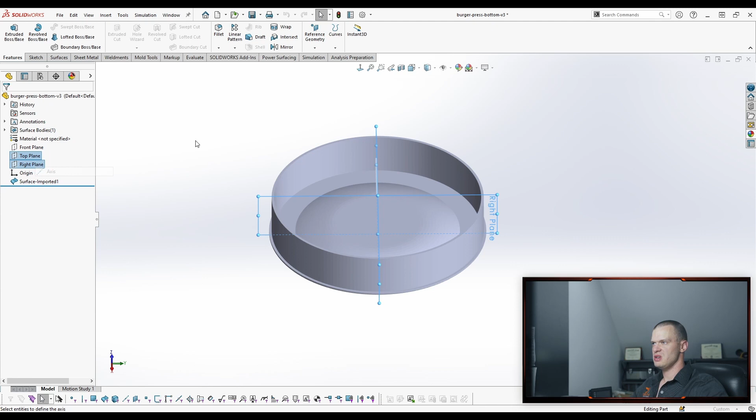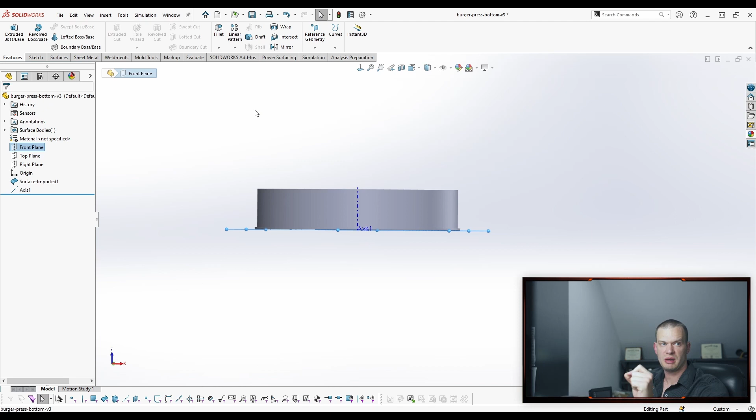One good rule of thumb is trust but verify. We know it looks pretty good, looks good enough, and that somebody's probably adjusted this so that when the STL loads, it's right. But one hard thing with scan data is sometimes the origin isn't properly defined when they export the file, so you'll bring in a scan and your origin is miles away. You're not even close, or maybe it is close, and that's why I'm doing this as an example. Maybe it's off by like 50 thousandths in a big model, and you'll never see it until you go to put that part you designed into something and you're off, because you just assumed it was in the right spot.

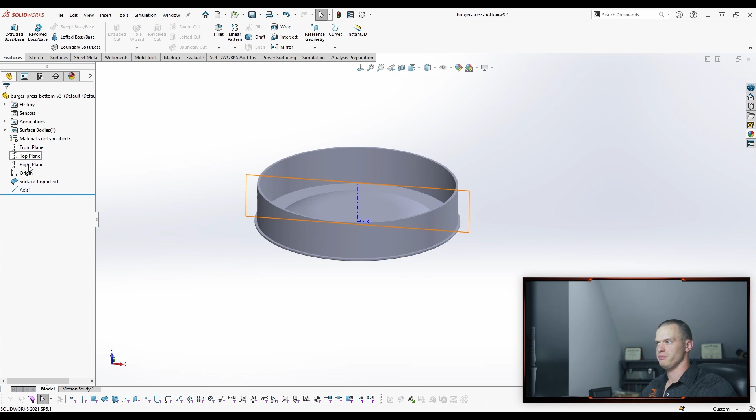So what we're going to do is we made an axis, which is super stable because it's based on these planes. Now before we start using these planes, we're going to verify that the center of this imported body is in line with that axis. So we're going to find the front plane and do the same thing we've been doing for a while.

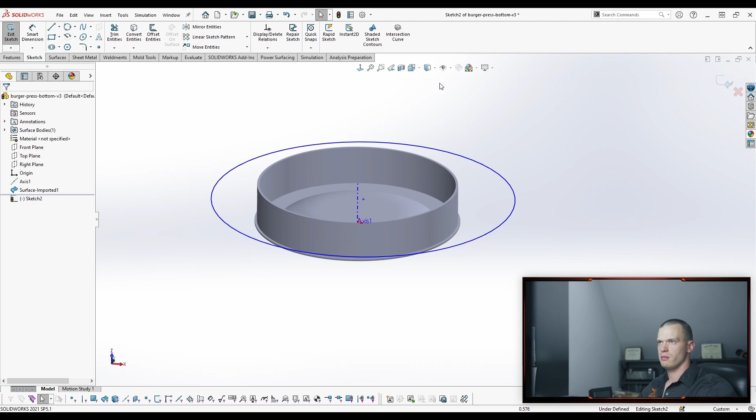So you didn't even try to draw it on the surface, you just put a big old circle up there and then start picking points. Yep, exactly. That's the same thing we were doing on that first one, or like when I was doing the cutouts.

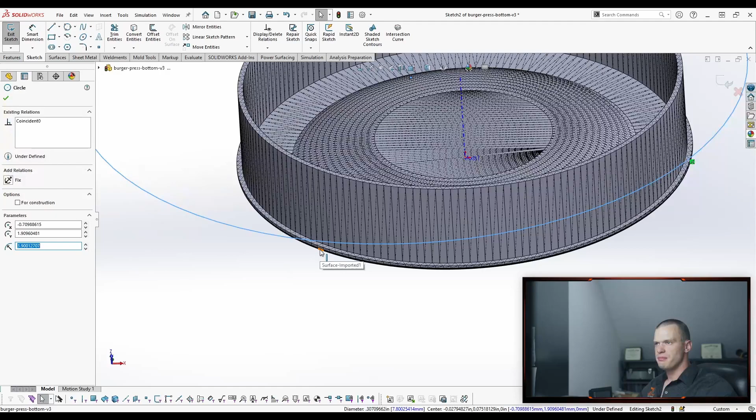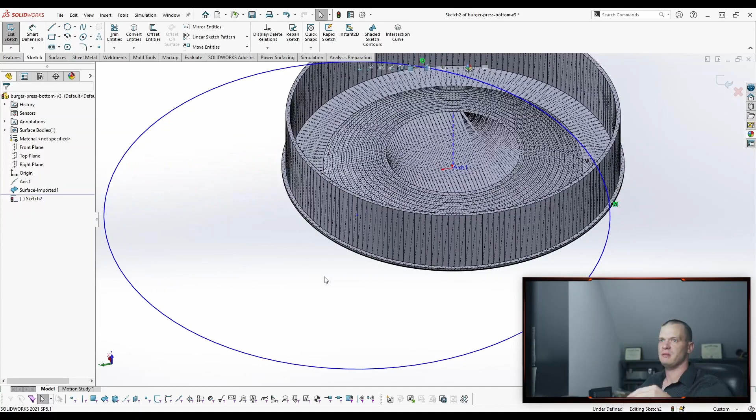Invalid sketch geometry, okay. It's better to make something that's the right shape and then go in and add the relationships, because the relationships will snap everything down. It really goes like: draw your shape, add your relationships, then your dimensions. Because a lot of the time your relationships are going to do a lot of the heavy lifting for you, so a sketch may only need like 3 dimensions.

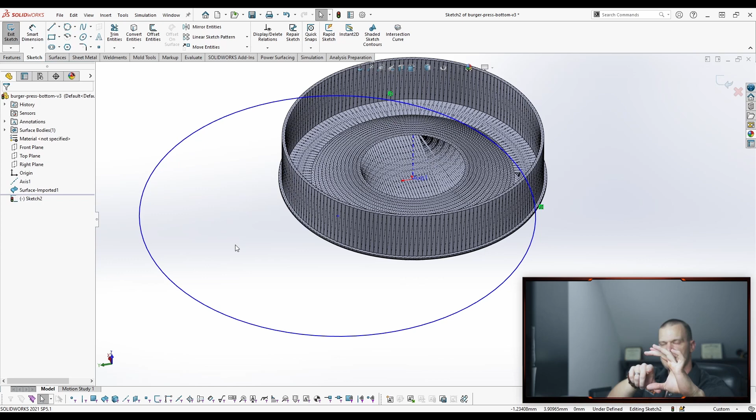Like if you were going to draw, say, a dice, the face of a die. You've got a square, and then maybe five holes or something like that. Those holes all have to be in a certain relationship to each other and a certain relationship to the square. So at the end of the day, all you need is 1 dimension on the side. You can do it really quick, right? You're going to draw a die, and a die looks something like this.

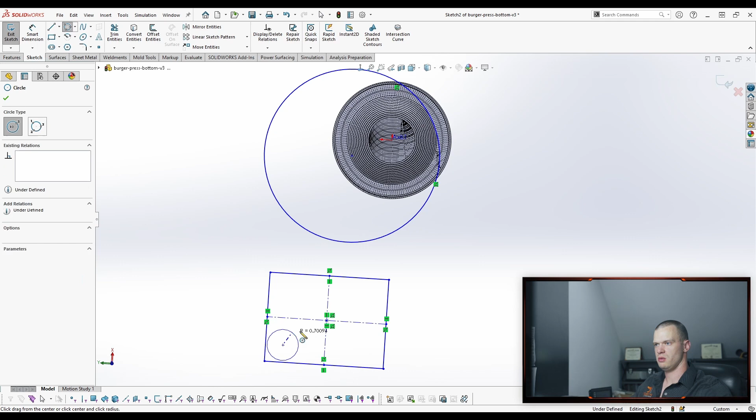And then say you've got 3 circles: 1, 2, 3, right? All of this has a relationship to each other. So this, we know, has to be equal to here, these need to be the same size. We know that these are actually going to be a mirror of each other across the middle.

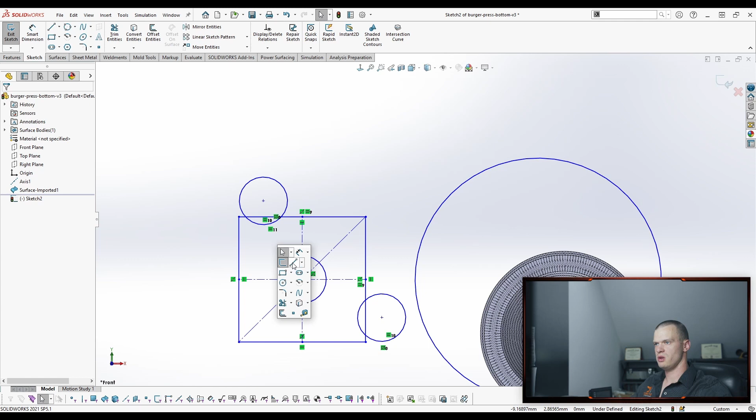So we could create the feature and then mirror it across, which would be a good way to do it. But you can also do something like this: create a construction geometry, pick these guys, and there's a symmetry. We also know that they need to be on this diagonal, so we'll make this construction geometry. We're going to fix this, because otherwise stuff's going to start walking off. We know that this has some size to it.

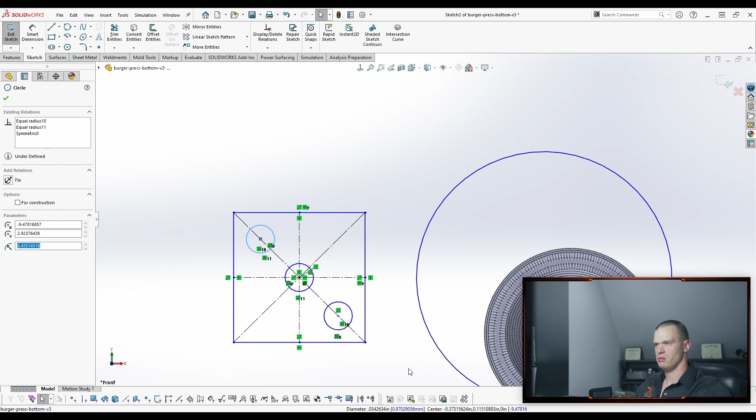Right? So actually to really get into this, we know that we want the space between the circles and the edge of the dice to be the same. You can go in here and say, okay, I've got a point here and I've got this here, and I want to dimension the tangency like this. Which you can, and then you can dimension the next one and even click it to make it equal.

But what I would probably do is just take this, be like, okay, there's a distance here, there's a distance here, and we want them to be the same. Now no matter what I make this, the gap between them will always be the same.

And that's kind of what I was saying with stability. It all goes back to stability, the way you do something. Geometry, sketch geometry is very stable. I could have dimensioned this - it's cheating now to select the line, but I could have dimensioned this.

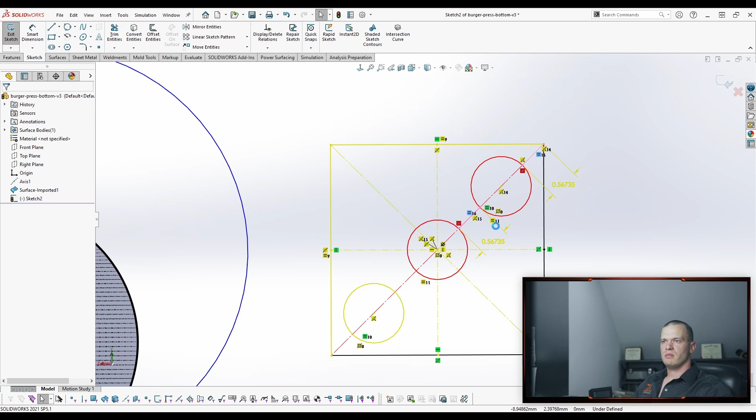And said, okay, I want this dimension here. Go in here, I want to equal this. I mean, they're already equal, but if you select it, it would do it. Say maybe they weren't equal, maybe it's like 0.75. I want these to be the same.

So you can add a dimension, and say that they're off - we didn't align them originally. You can click on this dimension and it'll make it equal, which is cool. You can also go in here and say, okay, I want this dimension to equal this dimension, so now there's a relationship between the two. When you update this one, the other one will change.

But sometimes you'll have things where you have a dimension and you set this equal, but the way that SolidWorks is solving and going through its equations - let me see if I can break this real quick. Trying to think. Yeah, probably not the way I have it set up.

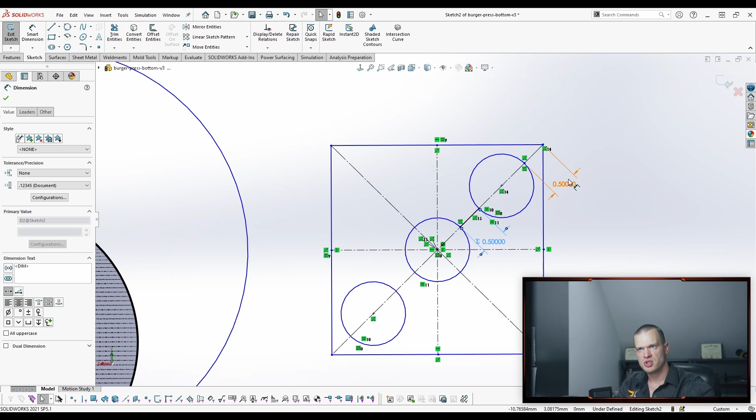But sometimes you'll set it up and say, okay, this dimension is my base dimension and this is what's driving them. Sometimes in the way it's solving, it won't reset this second dimension. So you'll change this to like 0.4 and this will stay 0.5 until after you close the sketch. And that's just an opportunity for it to throw an error later on.

So you're much better off if you know you want these equal, instead of putting a dimension on it and controlling it with the dimension, control it with sketch geometry. Like put the line in there, make the lines equal, and now this relationship will never break. It's not going to solve the sketch until these two lines are the same length.

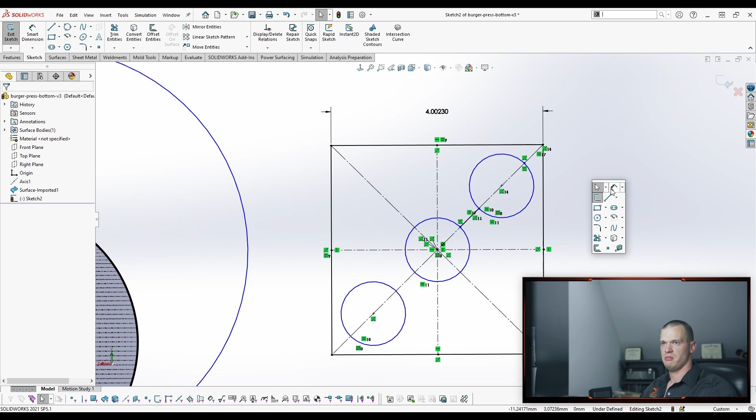And so then all you need is what? You need to do a whole dice, you need one side dimension, and then maybe you want to know how big your holes are. That's an entire dice with 2 dimensions.

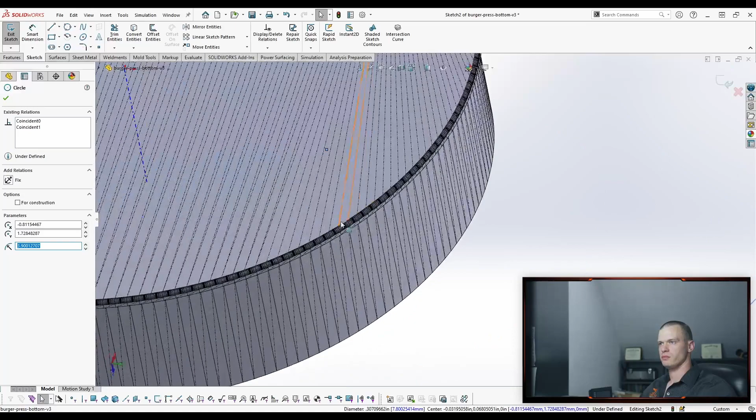That's pretty cool. It's interesting that you mentioned that with the dimensions versus when I was making that logo - it was a learning experience.

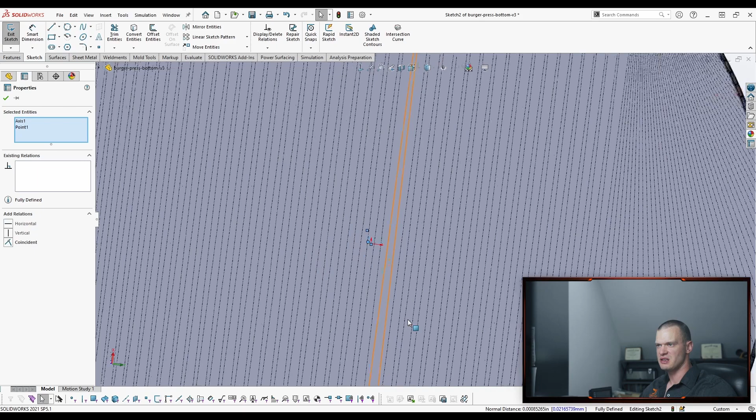So here's an example. Now I know that I misclicked here, but this is what it would look like if it wasn't centered. You'd have this center point, and then you'd have this axis, and you can go use the measure tool, which is always handy.

And we can say, okay, well, how far off are we? You're off by 7/10. No, you're off by what? This is a really big part. So you're off by 8/10 or something like that, 9/10. So it's just off by a little bit.

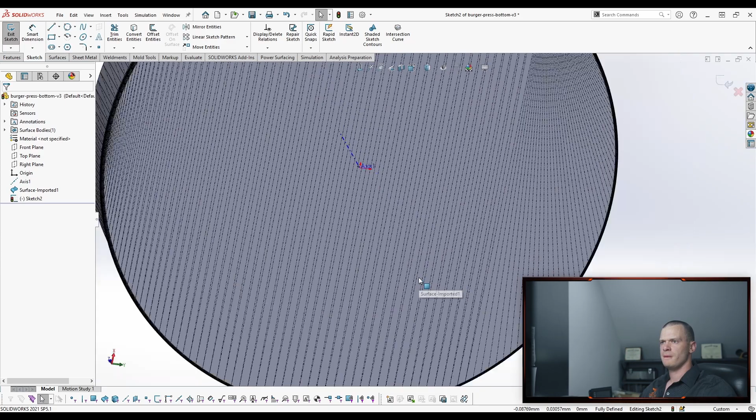But if we fix this here, I bet it'll go to where it's supposed to. Now I have to make sure that I put the other ones in the right spot too.

Yeah, it looks pretty dang good. Yeah, somebody's cleaned up these models nice for you.

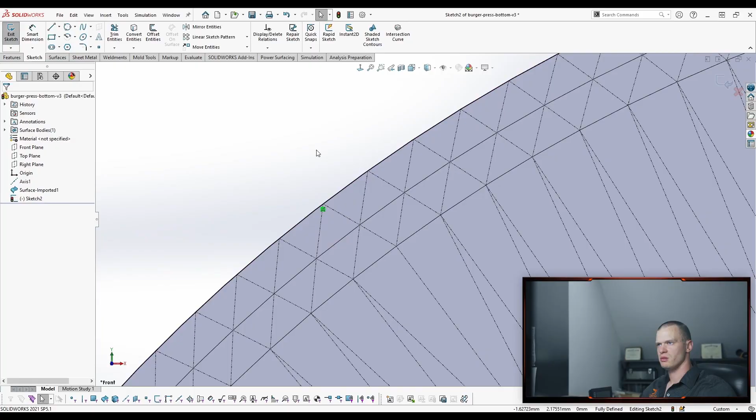This one was off of Thingiverse. This was one that we were playing around with. So in that case, this is probably CAD that was converted to an STL, because that explains why the planes are all perfect, and why it was only off by like 8/10, which is pretty good.

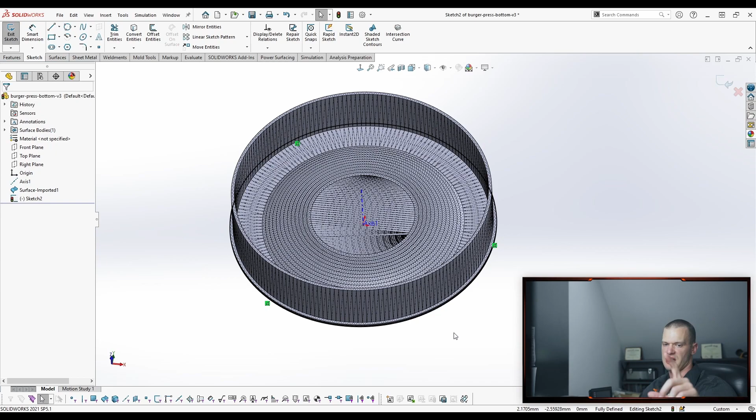So when you get actual scan data, like that little bottle one, that'll be a good one to go to next, because that has all kinds of problems on it.

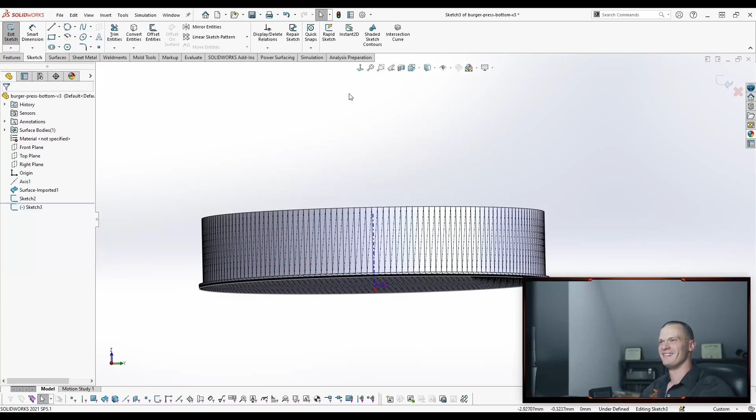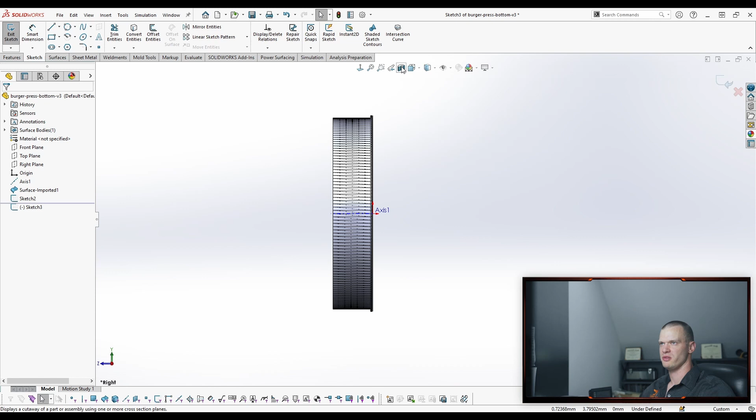So we're gonna use a section plane to look inside of the STL. So you can use this here - I'm not sure if you guys have seen this before or not, section plane. It doesn't like sectioning STLs because it's a lot to process, but all right, so now we're gonna do this entire burger press in one thing, in one pass.

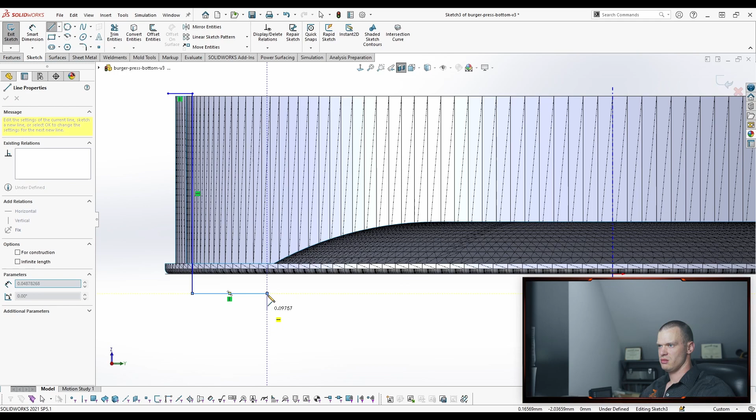Something like, looks something like this, right? Just like a fillet. We can fill it. We'll do 2 features. No, we'll do it in 1 feature, just to say we did it in 1 feature.

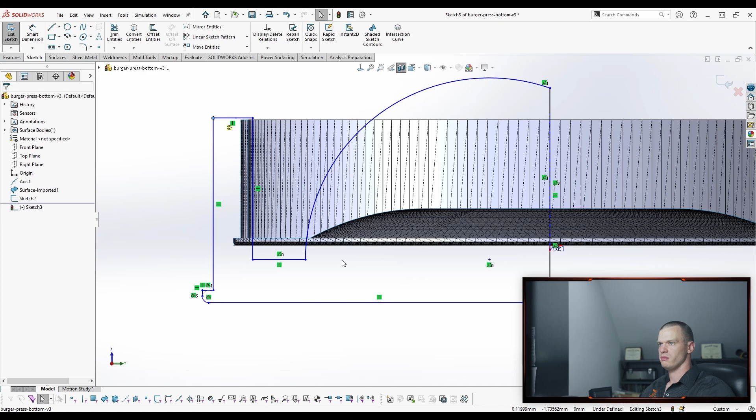But you guys can see where I'm going, right? You do that, one shape and revolve it. Yep, exactly.

And like we did with everything, right? We sketched something that was ugly, and now we'll go back through and use points to define where things are.

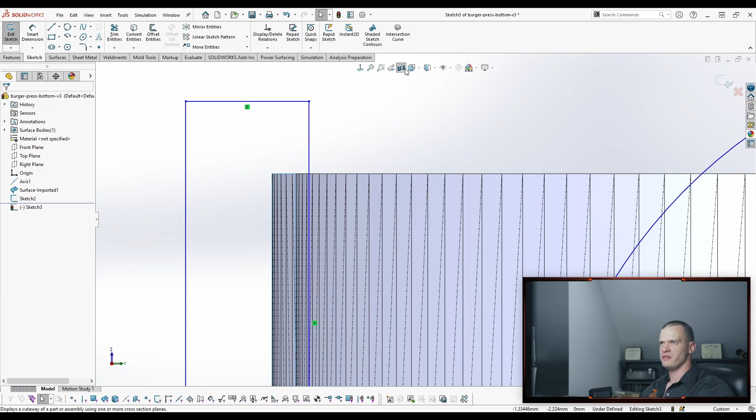So because we're in the section view, it's giving me this little double box thing, which is basically saying, hey, there's a point here, but we sectioned it. So you have to turn off the section view in order to grab the point. I saw something like that, I was wondering what it was. I couldn't grab that point. Yep, it's basically saying, hey, this is a section view, or it's the edge of a section view.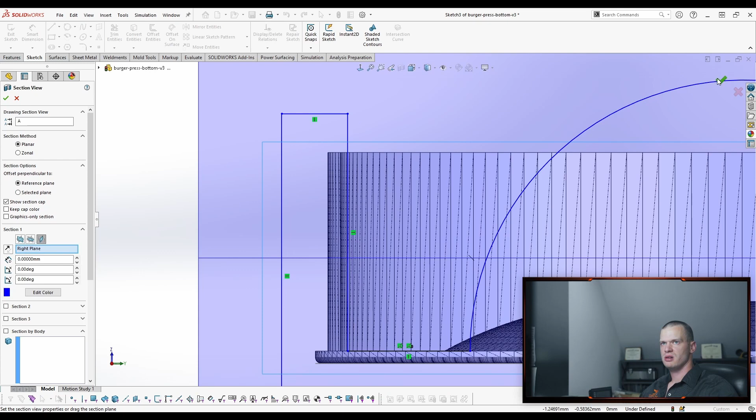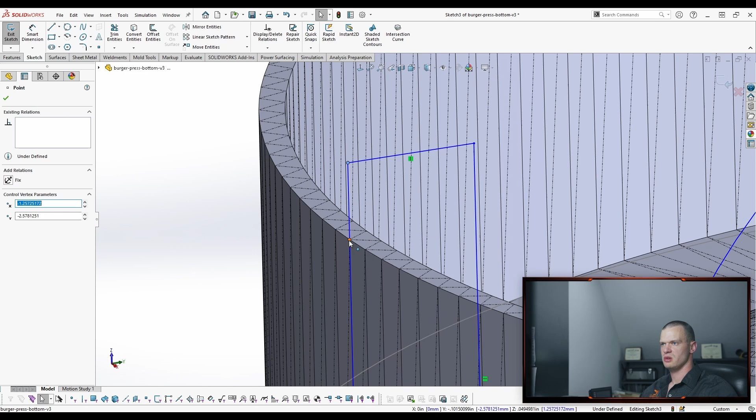I can turn the section view back on. Actually, it's a good way to find where that point is too. So you can see it's sectioned through here, and it created an artificial point right here because of the section view. But now we can turn off the section view, and there actually is a point right there, and we can use that to make this line coincident too, and actually do the top all at the same time.

All right, so another cool thing is the pierce command. So there's no point here, right? We don't know where this wall is technically, but we can do this and use pierce. Basically what it's doing is taking that line that went through the plane of our sketch, and it's putting that point on the line at the point where it passes through the plane.

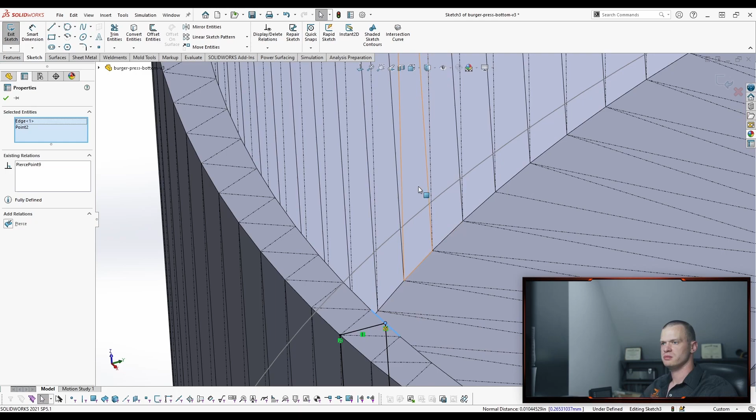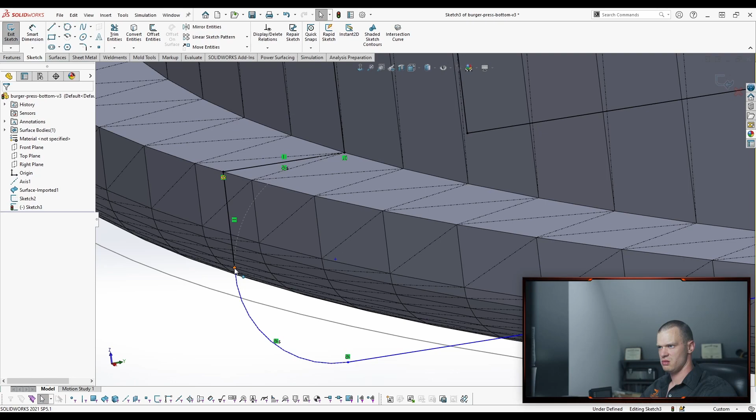So sometimes you're lucky and you get a point, and sometimes you don't. We know that this is that point from above. This is another pierce point. And because this is tangent here, and we're going to make a tangent here, we don't actually need to know the radius. Actually, no, we'll need 1 point. We'll need 1 point.

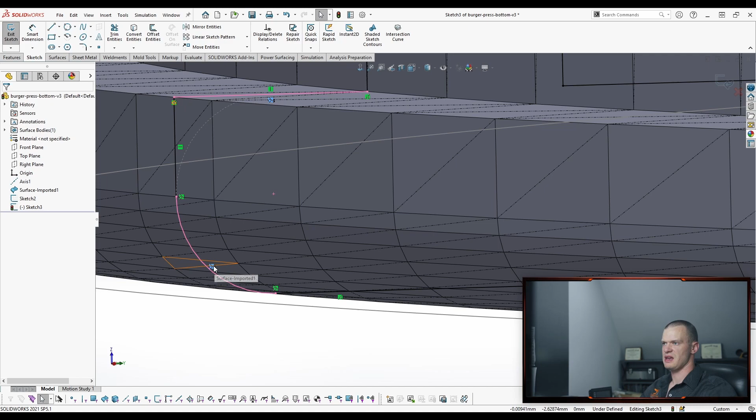No, we don't. Oh, that's why it's creating the tangent based on this here. So it added that in, right? We didn't want that. And that's one of those things, is knowing, thinking ahead - okay, I have 2 lines coming down to a point, I'm gonna have a radius between them. I don't know what that radius is, and the software shouldn't solve for it. But I know there's something wrong, because when I snapped that line to it, it solved, and it said okay, I know this radius, but it doesn't actually.

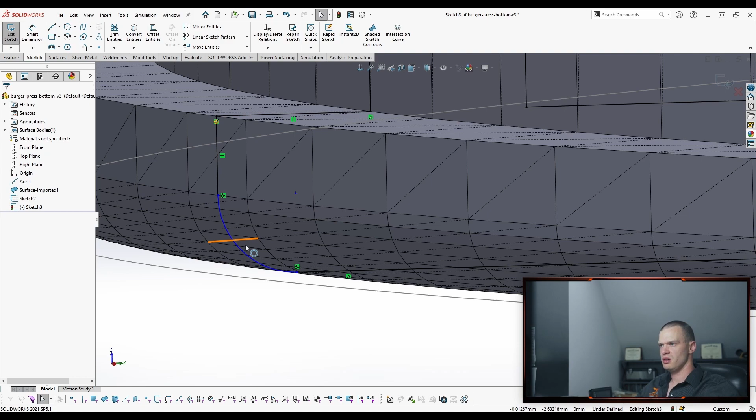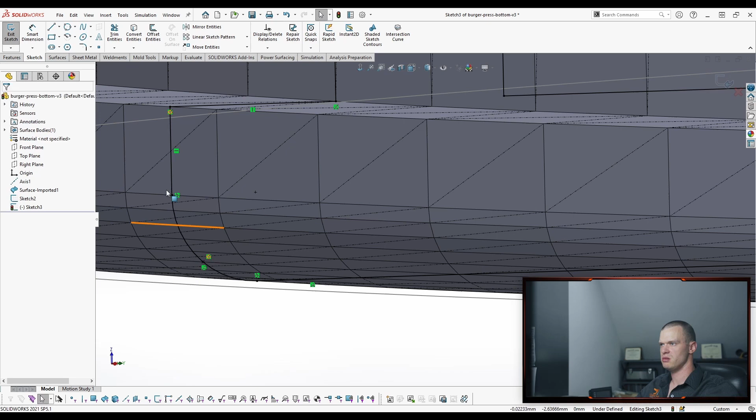So now for this, there's no points on this radius, right? And because there's no points along here, we have to add a point in order to use the pierce command. So we just add a point to the radius, and then we'll pick a line that goes through, and we'll pierce it. And then we can also measure and check - what is this? So it's 12 something, looks like it's probably 0.5 inch. That's probably what it was before it was converted to STL.

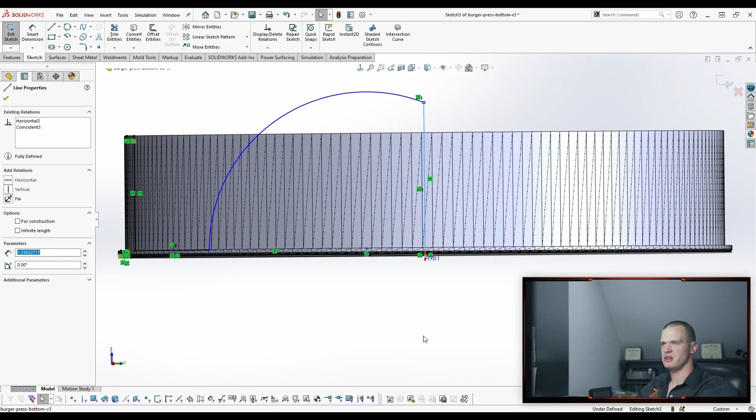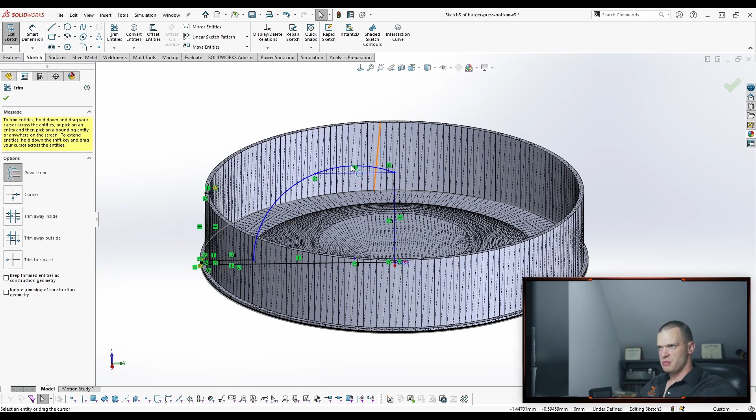So what else will we have left? We know that this is going to be on our center axis, so this is already defined. And now we just have this big thing here. Actually there's a flat across there, isn't it? So that's pretty easy, we'll just draw a flat. Make it horizontal, make it vertical, trim this back. It doesn't look like it's tangent. Maybe it is.

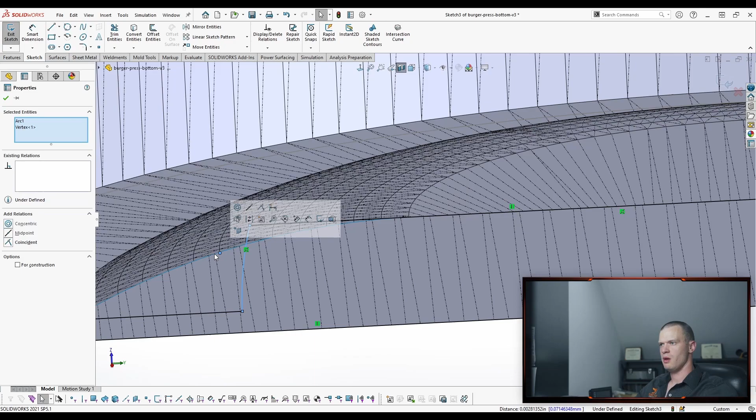So another thing it added was a coincident constraint between the midpoint, or between the center. There you go - need one more? We'll just assume the tangency's here, but it's probably not.

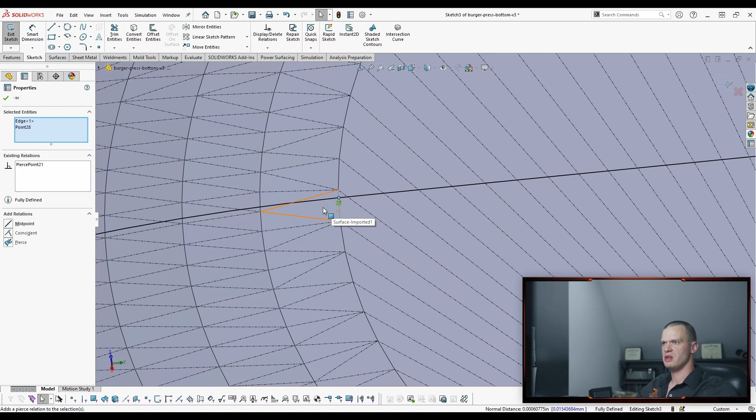And that's the advantage too of having the 3D mouse, is you can just fly around. So what I would probably do for this is what we did in the wheel example, where we defined a circle using the 3 points and then snap the radius to it. I'd probably do that, but yeah, then you just revolve.

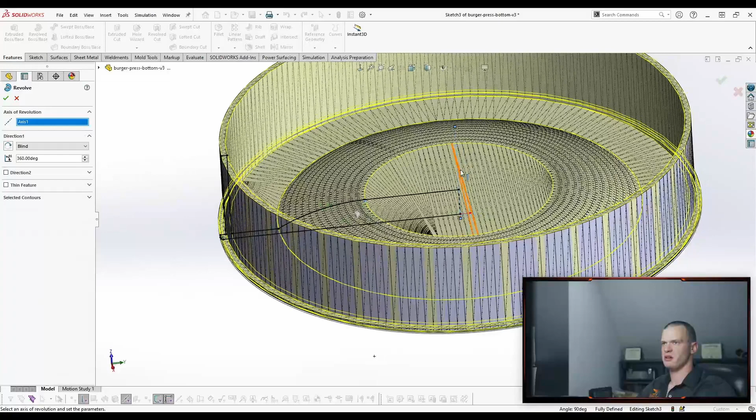Always pick the more stable geometry. Don't pick the line, right? You might replace this line later. This axis is never going to move. There you go. Done.

Yep. All right, yeah, one sketch. And it's just looking at it and seeing - okay, it's actually symmetric.

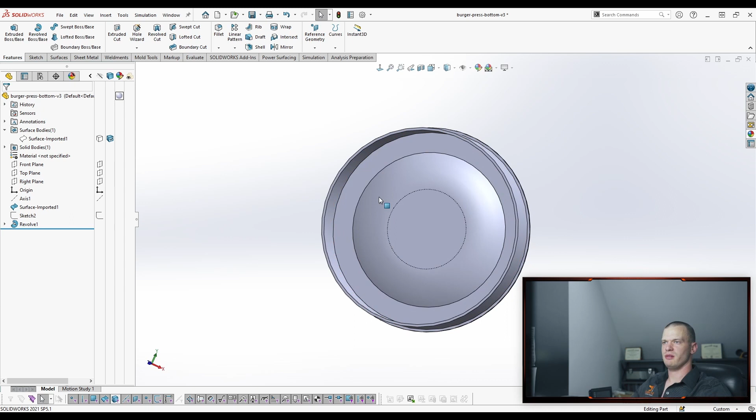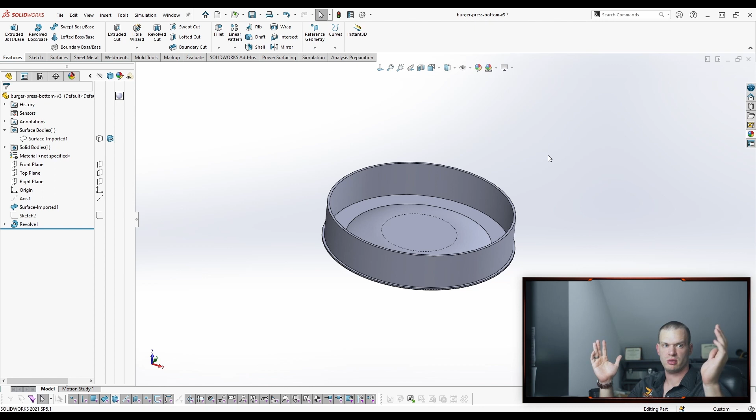Even when I open the wheel too, right? It's like, okay, where's your symmetry? Where's your pattern? What can you do? Like that wheel, looking back on it, you could have done the outside rim, the inside hub, and the main plate that all of those holes get cut out of. You could have done that as an axially symmetric sketch too, right? And revolved all of that in one feature and then cut all your holes in. So maybe that would have been a better way to do it. I mean, you're going to get there either way.